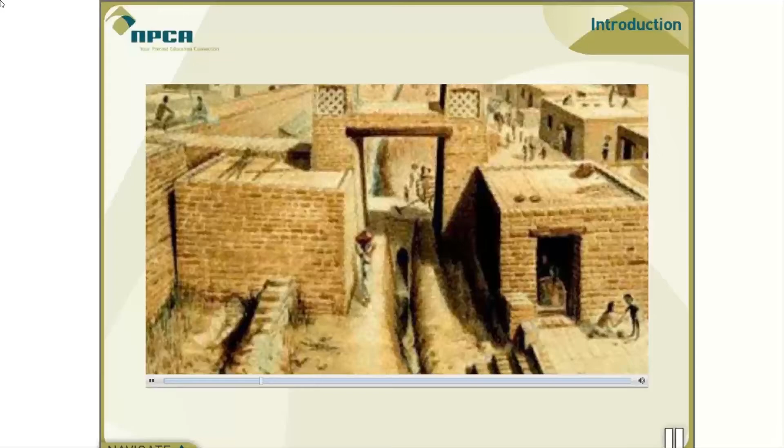Sites excavated in the Indus Valley and in Punjab show that bathrooms and drains were common in Indian cities 4,000 years ago. Streets were drained by covered sewers 2 feet deep and made of molded bricks, cemented with a mortar of mud.

Within the houses, drain pipes were made of pottery embedded in gypsum. Even by 2000 BC, the Greeks and Egyptians had adequate supplies of drinking water for their cities, drained streets, had bathrooms in their houses, and in Crete, water flushing arrangements for toilets.

The Incas also had impressive sewer systems and baths. As sanitary engineers, the Romans set a great example and left their mark in history.

A public water supply was considered a basic essential of civic life. They had well-developed water supply systems and drainage systems, and their standards of engineering sanitation were not matched again in Europe and North America until the 19th century.

Studies show that Rome's water supplies exceeded 40 gallons per head per day and was supplied to public baths, fountains, and other public structures as well as private houses.

At their peak, they were able to provide an estimated 300 gallons per head per day. Their aqueducts and cisterns can be seen all over Europe and were frequently copied in medieval times.

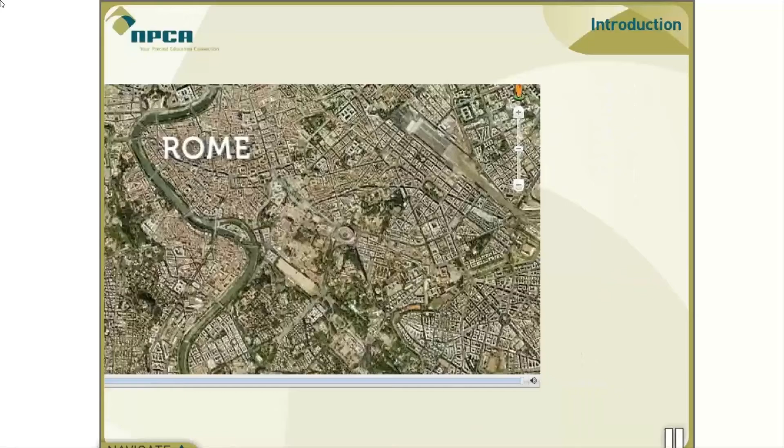The Cloaca Maxima is one of the world's earliest sewage systems. Constructed in ancient Rome in order to drain local marshes and remove the waste of one of the world's most populous cities, it carried effluent to the river Tiber, which ran beside the city.

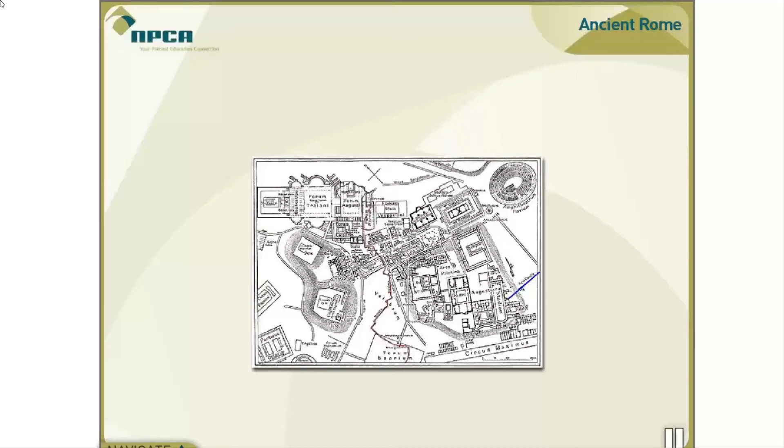The name literally means greatest sewer. According to tradition, it may have been initially constructed around 600 BC under the orders of the King of Rome.

The city's first major engineering achievement was the Cloaca Maxima, an extensive sewer system which still functions today, 2,500 years after it was constructed.

The Cloaca Maxima flushed runoff from Rome's city streets into the Tiber River. Engineers also used the sewer's underground pipeline to drain the marshland between Rome's hilltop villages.

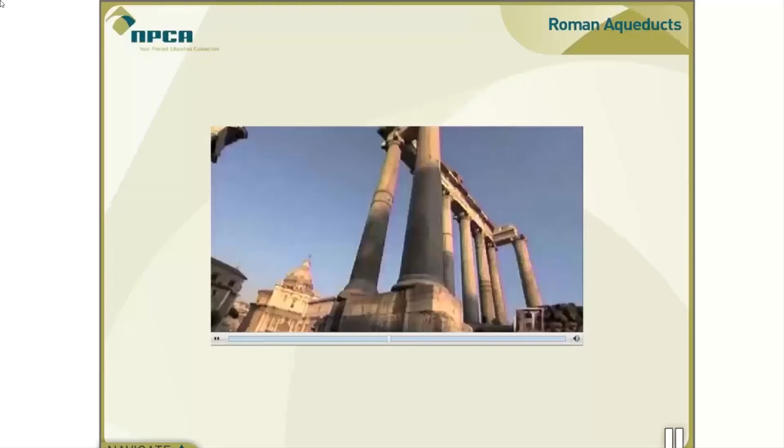There they built the Forum, ancient Rome's downtown district. The construction of the Cloaca Maxima is the key event in transforming Rome from a series of tribes living on disparate hills around a swampy marsh.

into a kind of centralized, unified culture. The new Roman Forum that resulted from the draining by the Cloaca Maxima really allowed that culture to consolidate in one central place.

The Cloaca Maxima was but one example of early civilization's construction of storm sewer systems. Sewer pipe has been found in the ruins of ancient Babylon, which is now in Iraq, estimated to have been built back in 3000 BC.

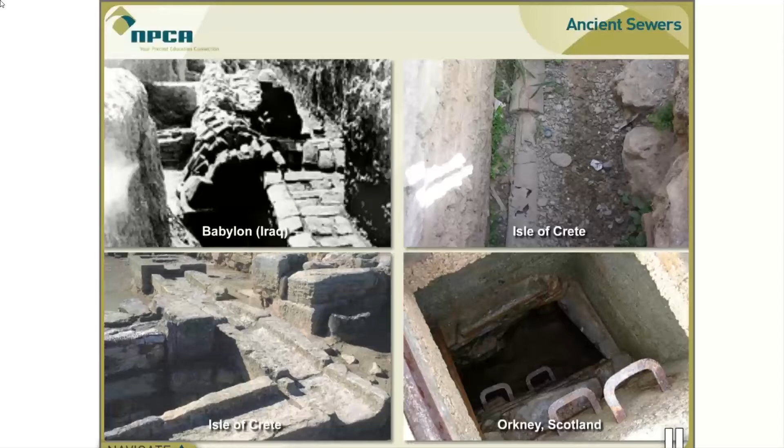Stone drainage channels built in 4000 BC can still be found on the Isle of Crete. Sewer manholes built in 3000 BC have been found in mainland Orkney, Scotland.

As citizens in ancient Rome did back in 600 BC, people today also depend on the functionality and reliability of storm and sanitary sewer systems. There are about 1.2 million miles of sewer pipe in the United States alone.

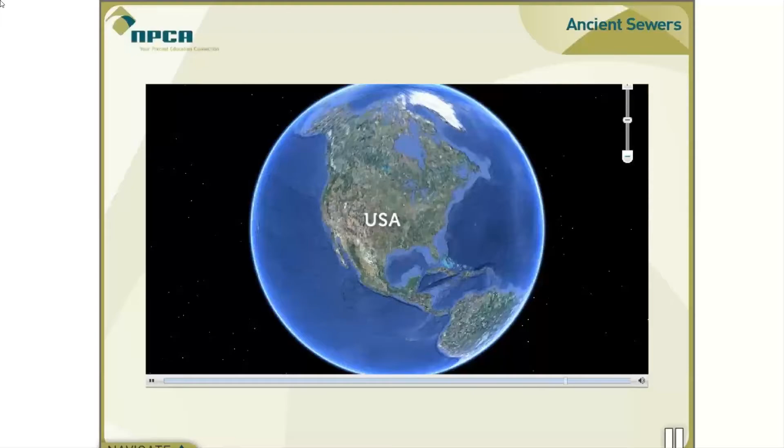Systems in place are sight unseen, and people seldom think about them when they're functioning properly. However, if a system breaks down, it can certainly raise awareness on how important this infrastructure can be to daily life.

Issues can occur when sanitary or storm sewer systems are improperly designed to accommodate the demand. Also, problems may arise when sewer components are poorly manufactured or installed.

Many portions of our sewer infrastructure are failing due to aging. All these factors can eventually contribute to a variety of unfavorable situations, including leakage.

When a sewer system, which is intended to be watertight, starts to leak, there can be serious ramifications to the surrounding environment, public health, and structural stability of the structures.

When a sewer is leaking, sometimes it can undermine the surrounding soil by drawing dirt into the sewer line, creating large voids. Loads above these voids can cause the ground or roadway to cave in.

However, undermining due to leaking at the joint between the pipe and structure can also be the culprit. Here is an example of a slightly more severe cave-in.

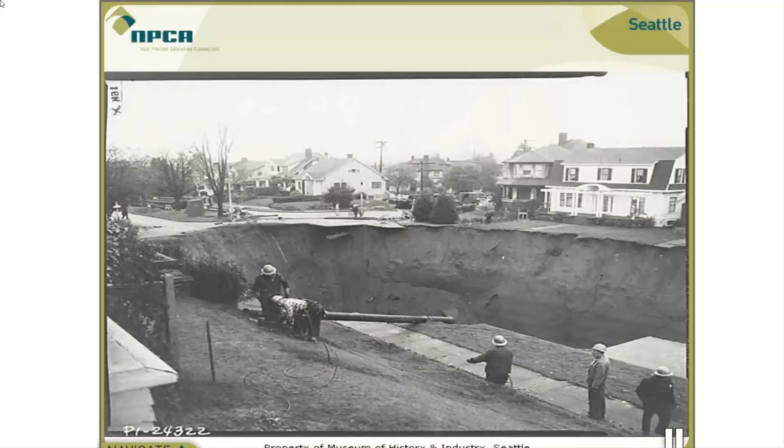We see workmen at the top of the hole caused by a sewer break in Seattle, Washington on November 11th, 1957. The Ravenna trunk sewer line had been built in 1909. The original contractor on the project gave up because of the quicksand prevalent in the area, and it was this quicksand that contributed to the underground cave-in.

A 330-foot deep sinkhole formed in February 2007 in Guatemala City and swallowed about a dozen homes, forcing the evacuation of nearly 1,000 people in a crowded neighborhood. Officials blame the sinkhole on recent rains and an underground sewage flow from a ruptured main. A spokesman for the Municipal Water Authority said the sewage main ruptured after becoming clogged. He said the city was aware of the blockage, and the Army had been considering a controlled explosion to clear the pipe.

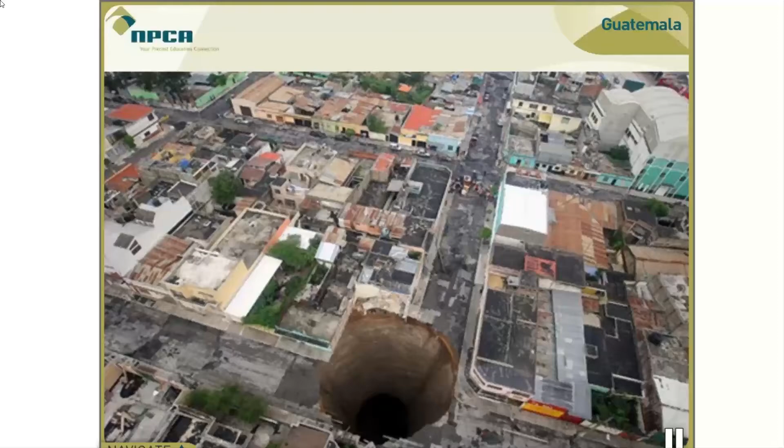The sewer ruptured, and massive undermining took place. When systems are overwhelmed by increased volumes that surpass their capacity, large pressures build up, which can lead to serious damages. Water will always find a way out. In some cases, the pressure causes the water to surge through the manhole casting.

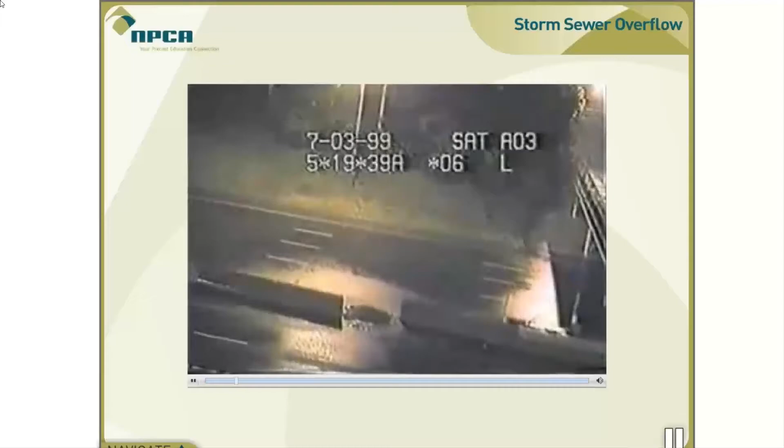Here we see an extreme example of this phenomenon. This is highway camera footage of a portion of I-35 in Minnesota back in July 1999. The stormwater system was severely overwhelmed by the storm event. The point is, to avoid having everything from dips in the road to Old Faithful in the middle of the highway, stormwater and sanitary collection and conveyance systems must be designed, manufactured, installed, and maintained properly.

Now, let's look at sewer system components.

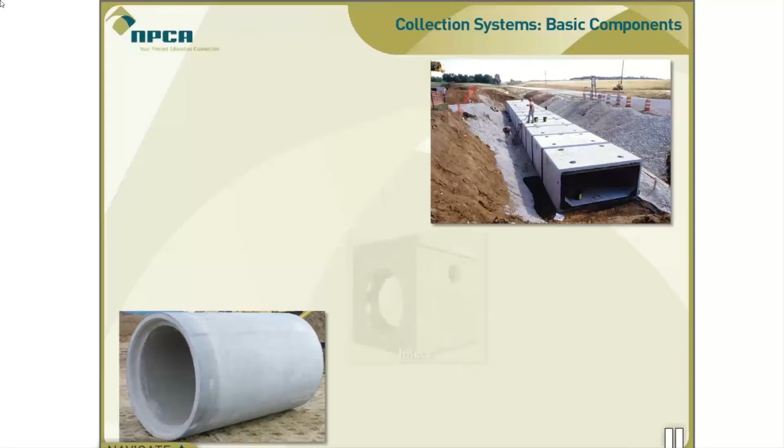The basic components of a sewer system can be divided into pipes and structures. The pipe can be round, elliptical, arch, or rectangular box culvert. Structures can include inlets, catch basins, and manholes.

These basic components are assembled to form a system that collects stormwater and wastewater from homes, commercial properties and surrounding streets, parking lots and landscape out to the main sewer line, and conveys it from point A to point B by gravity or pumps for treatment and disposal.

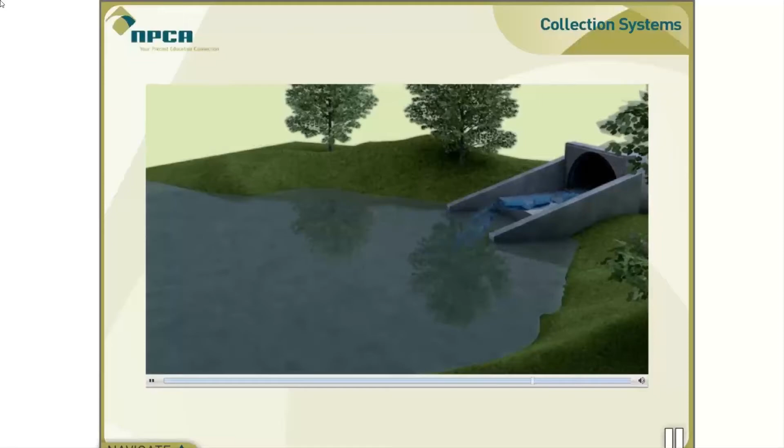At times, conditions may require advanced stormwater systems. Large paved areas such as store parking lots can generate so much surface runoff that systems must be installed that can not only provide treatment, but also temporary storage to avoid overwhelming the main sewer lines.

Structures that can provide a level of treatment can range from basic to complex. Drain inserts are manufactured filtration products placed in a drop inlet or a catch basin inlet to remove sediment and debris. A multitude of inserts exist in various shapes and configurations. Typically, the insert consists of a frame that acts as the support structure for the filtering media and sediment debris collection device. This frame generally rests beneath the grate of a drop inlet or is attached to the wall of a curb opening style catch basin.

Typically, a collection device made of polypropylene, filter fabric, or stainless steel will be attached to the frame, fitting entirely within the dimensions of the inlet structure without blocking the outlet piping. Filtration media will be secured within the collection device and will vary by manufacturer. Media types include polypropylene, porous polymer, treated cellulose, and activated carbon, depending upon the targeted pollutants.

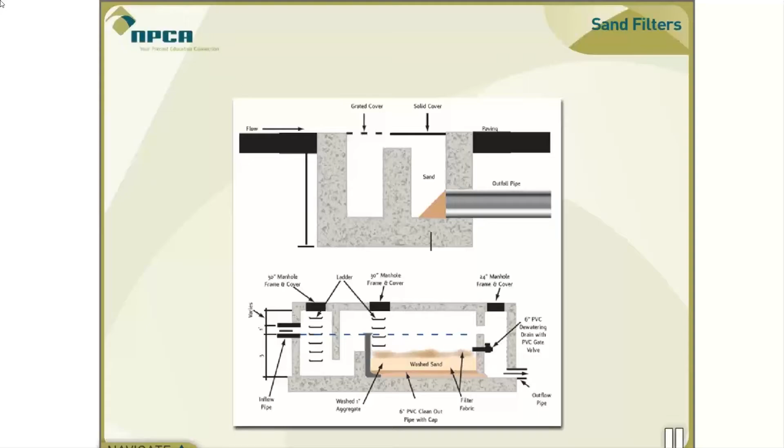Water quality units, also commonly called trapping catch basins, oil grit separators, or oil water separators, consist of one or more chambers that promote sedimentation of coarse materials and separation of free oil, as opposed to emulsified or dissolved oil, from stormwater. Some WQUs also contain screens to help retain larger or floating debris. And many of the newer designs also include a coalescing unit that helps promote oil-water separation.

WQUs typically capture only the first portion of runoff for treatment and are generally used for pre-treatment before discharging to other best management practices.

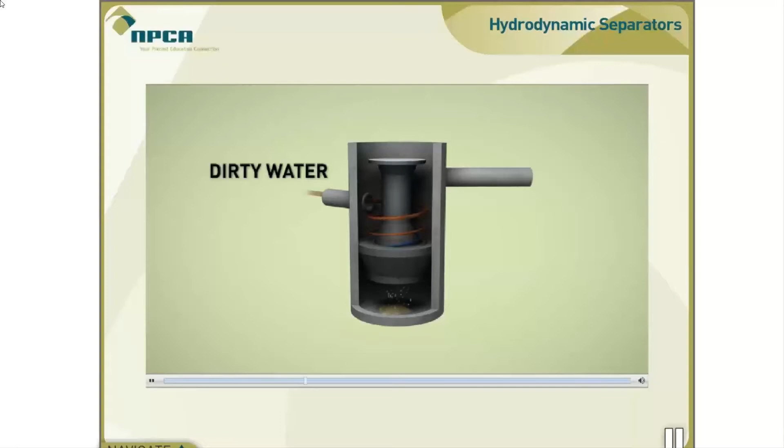Hydrodynamic separators are flow-through structures with a settling or separation unit to remove sediments and other pollutants, widely used in stormwater treatment. No outside power source is required because the energy of the flowing water allows the sediments to efficiently separate. Depending on the type of unit, this separation may be by means of swirl action or indirect filtration.

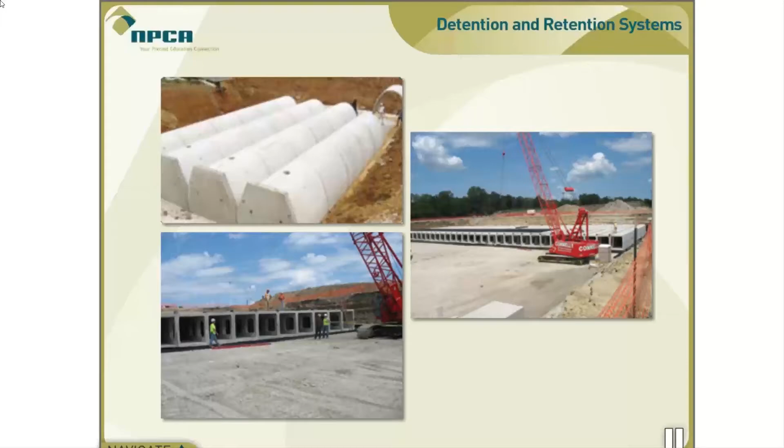Underground stormwater retention-detention systems capture and store runoff in large pipes or subsurface structures. Stormwater may enter the system through a riser pipe connected to a catch basin or other stormwater collection structure, and then it flows into a series of underground chambers or compartments for storage.

This captured runoff typically is retained throughout the storm event and then released directly into the surface waters through an outlet pipe. This outlet is sized to release the stored runoff at predetermined flow rates that serve to reduce the effects of pollutants leaving a site during peak flows.

These systems typically are constructed in highly developed areas where land cost and availability are major concerns. They will generally be located under parking lots or other paved surfaces in commercial, industrial, or residential areas.

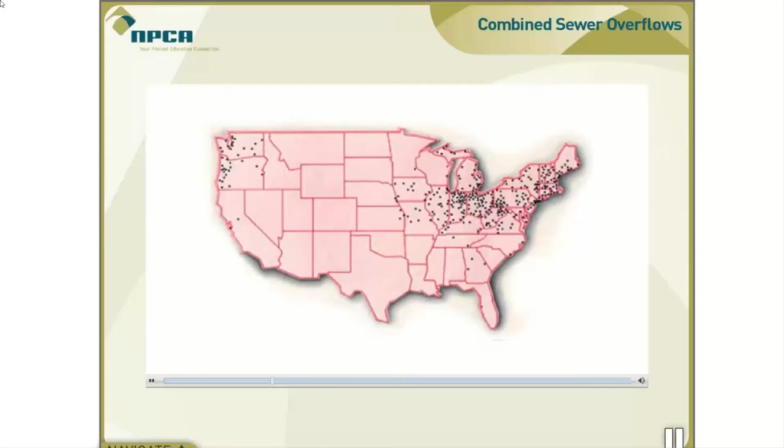Combined sewer overflows, otherwise known as CSOs, and sanitary sewer overflows affect the quality of water resources in many parts of the United States. Over 800 communities have combined sewer systems, serving about 40 million people, mostly in the Northeast, the Great Lakes region, and the Pacific Northwest.

CSO discharges during heavy storms can cause serious water pollution. A 2004 EPA report to Congress estimated that there are 9,348 CSO outfalls in the U.S., discharging about 850 billion gallons of untreated wastewater and stormwater to the environment.

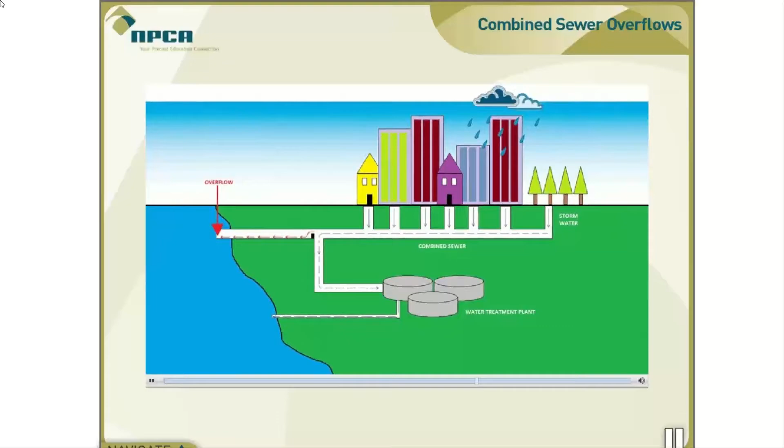EPA estimates that between 23,000 and 75,000 sanitary sewer overflows occur each year, resulting in releases of between 3 and 10 billion gallons of untreated wastewater.

Portland is a city located in the northwestern United States, near the confluence of the Willamette and Columbia Rivers in the state of Oregon. Portland is Oregon's most populous city and the third most populous city in the Pacific Northwest. Approximately 2.2 million people live in the Portland metropolitan area.

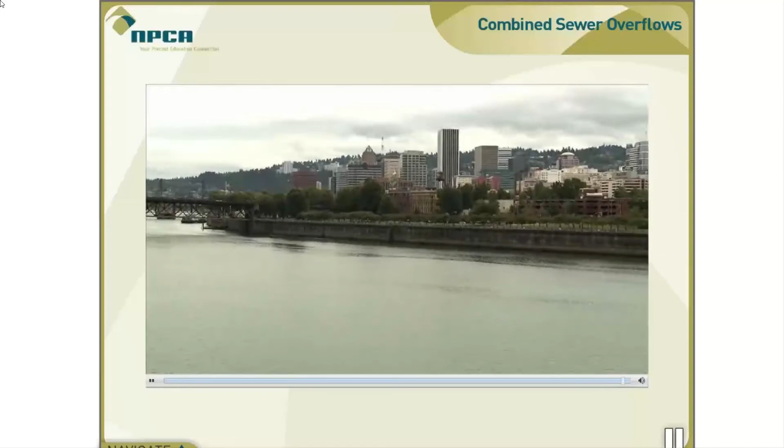River health is a prime concern to our citizens, but also the beauty of the river, the ecosystems, and community health, which is tied to river health.

Ideas were brought forward to update the sewer system to greatly reduce or eliminate combined sewer overflow into the Willamette River. But if you went back 20 years, the idea of swimming in the Willamette River would have been of concern. But you see more boating, canoeing, kayaking, fishing, which I think is evidence of cleanup efforts that the city has undertaken, creating a healthier riverway.

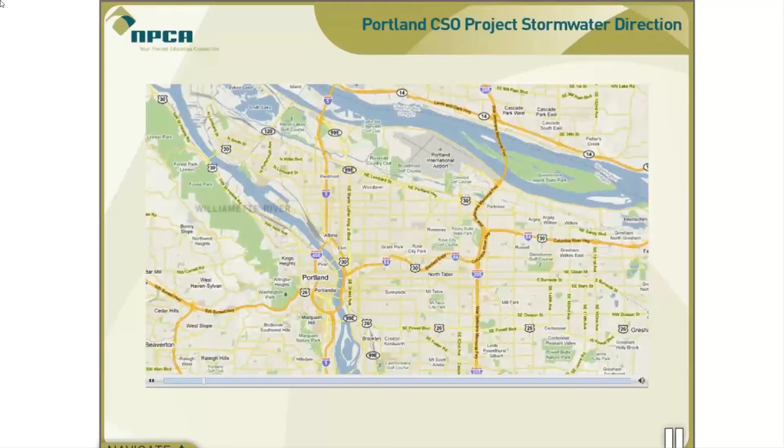During heavy rains, a large portion of the runoff goes to the Willamette River. A portion of the runoff flows into the Columbia Slough.

In the past, during rain events, combined sewers were overwhelmed to a point where the excess wastewater would be discharged into the Willamette River. The wastewater carried raw sewage that polluted this major waterway and negatively impacted the quality of life for Portland residents.

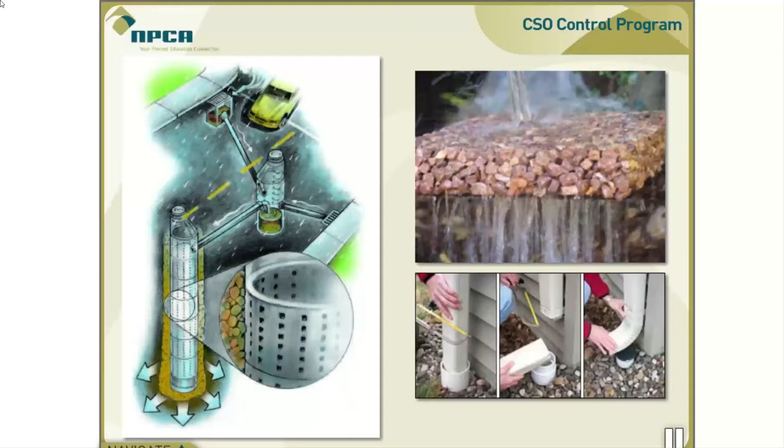Portland started the CSO control program in 1991 with a set of cornerstone projects that removed stormwater from combined sewers. Projects included disconnecting downspouts from sewer systems, using pervious pavers, installing street sumps and sedimentation manholes. Controlling the CSOs was key to improving Willamette River water quality.

In 1991, the state of Oregon gave the Portland Bureau of Environmental Services a final order to clean up the Willamette River and the Columbia Slough by December 1st, 2011. After nearly 20 years, the program is complete and added up to approximately $1.4 billion in costs.

CSO solutions include projects to remove stormwater runoff from sewers and building new facilities to carry sewage and stormwater to the Columbia Boulevard wastewater treatment plant.

With the installation of large pipe along the riverbank, a diversion is created for the overflow. The purpose of this diversion is to transport the combined sewer overflows that would normally flow into the river to a pump station and then eventually a treatment facility.

The CSO program started around 15 to 20 years ago, and its purpose was to separate the combined sewer overflow system that was currently in place. There were two massive tunnels built under the Willamette River to contain the overrun during a storm event and hold it there until the treatment facility could handle treating it. So it sits under the river and then eventually is pumped into the treatment facility and treated.

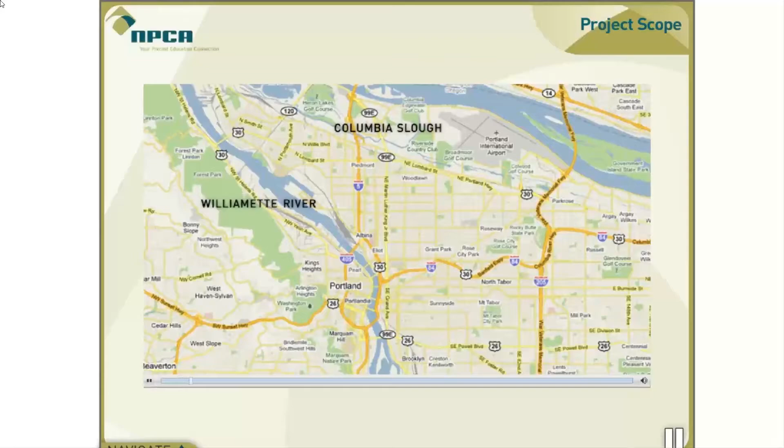Looking at the map of Portland, we see the east and west side big pipe on either side of the Willamette River. The pipes enter into the Swan Island pump station on the east side of the Willamette, which then directs the water through the Portsmouth force main north to the Columbia Boulevard wastewater treatment plant. The Columbia Slough consolidation conduit also flows directly into this treatment plant.

Construction of the Swan Island pump station and the west side big pipe was completed in 2006. The west side big pipe measures 14 foot in diameter and is 3.5 miles long. The east side big pipe measures 22 foot in diameter and is 6 miles long. As a result of this project, CSOs to the Willamette River have been reduced by 94%.

Some of the pipe was installed using a micro-tunneling process. That method is similar to ones used for massive underground projects, such as the Big Dig in Boston and the Channel Tunnel underneath the English Channel. This process allows the pipe to be installed without interrupting commerce or disturbing utility services buried under the surface of streets and roadways.

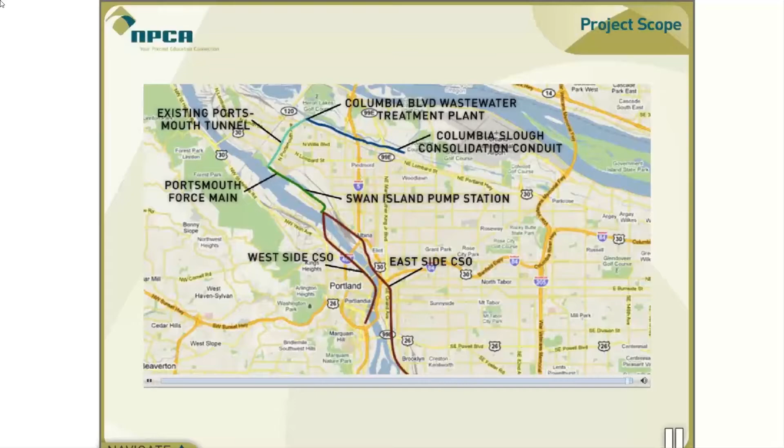Well, the micro tunnel process is you've got your tunnel boring machine, which is the first thing they launch into the hole. The tunnel boring machine has a cutting head. It's 50 feet long overall, 10 foot long segments. It's quite a machine, but it has no method of self-propulsion. So the only way to get the machine to move forward is to put a piece of pipe behind it and then push it with a couple hydraulic rams.

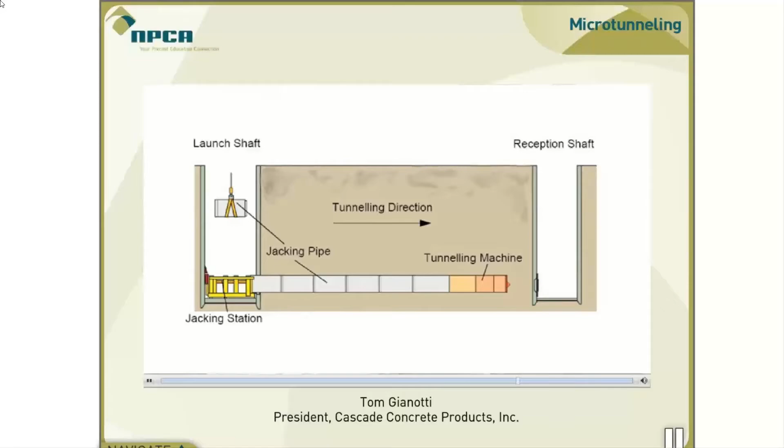So what they do is they push the machine into the hole first, then they'll load in their first pipe. They will push the pipe with the rams, retract the rams, load in another pipe, push, and so on. Now, every time they put in a new piece of pipe, there's conduits, there's plumbing, there's air ducts, all sorts of things need to be connected and plumbed inside that pipe before they can start pushing.

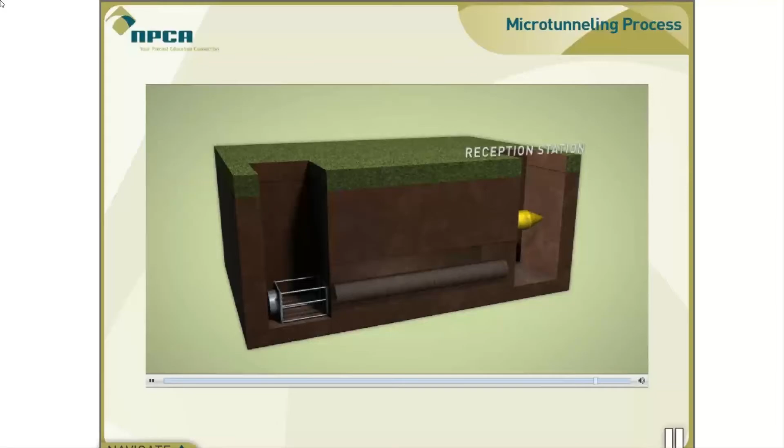At the launching station, a section of pipe is lowered into position. Hydraulic jacks then push the pipe forward, which propels the drill head through the earth until it emerges at the reception station. The drill head is not self-propelled. It moves forward due to the pressure exerted via the hydraulic jacks in the launch tunnel. The hydraulic jacks produce a substantial axial load on the pipes, which serve as a conduit for the jacking forces to propel the drill head.

So it's very critical that each pipe in the string performs. Because if one were to fail, if one link in the chain fails, the machine is stuck. And that could be a real problem.

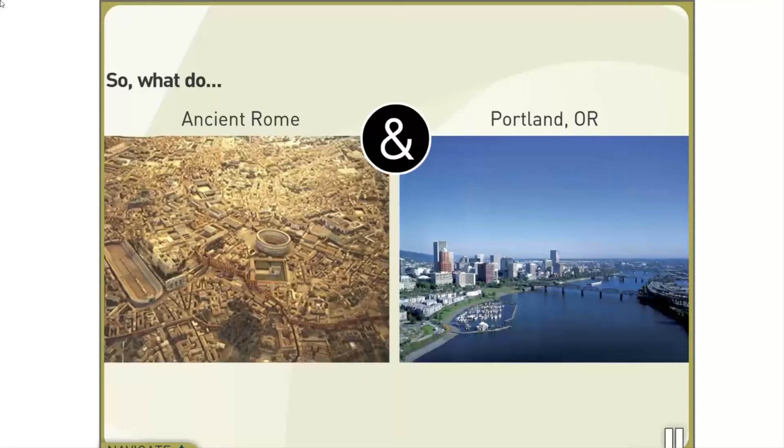So, what do ancient Rome and present-day Portland have in common? Concrete. Just as we do today, ancient civilizations chose concrete as their material of choice. Many of the pipe and structures unearthed recently by archaeologists were made of concrete. Modern technology enables us to move the manufacturing of concrete from the variable conditions in the field to a plant environment which greatly enhances quality control.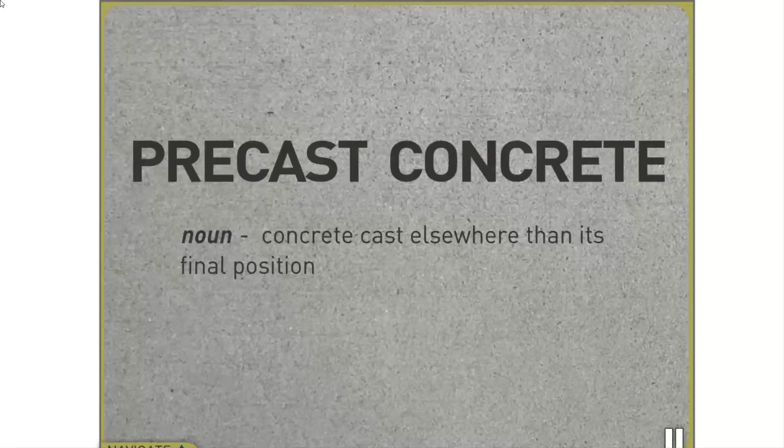Concrete that is cast elsewhere than its final position is known as precast concrete. Precast concrete structures are manufactured in a controlled environment that enables careful monitoring and management of quality control procedures. Let's go through the typical manufacturing process. The production cycle begins with setting of the forms. The core for this section of large diameter precast pipe is set in place.

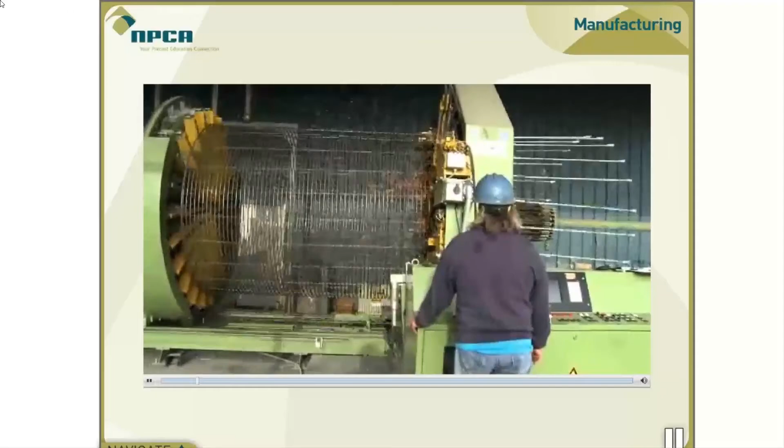Reinforcement for this section of pipe is assembled in another area. This cage machine precisely measures, cuts, and welds lengths of plain and deformed wire to form the reinforcement cage. Additional deformed rebar is placed and tied onto the cage according to design drawings. This will further enhance the pipe's ability to withstand stresses in the field. Manhole cages are built in a similar fashion, while inlet and box culvert cages are assembled by hand.

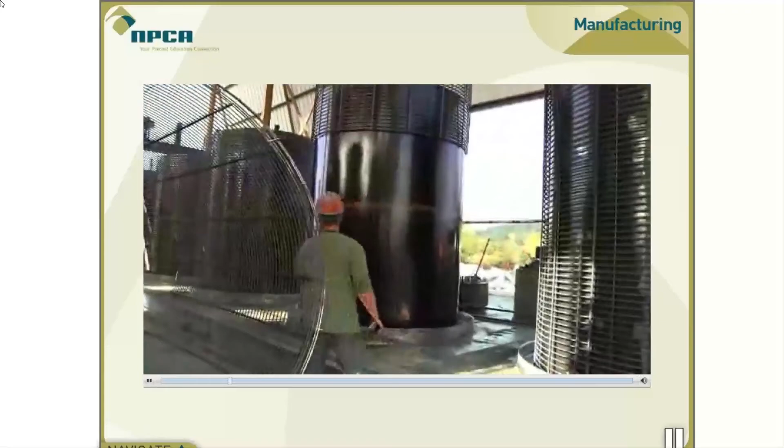After form release has been applied to the core, the steel reinforcing cage is put in place. The diameter of this cage is manufactured to exacting dimensions and has to be carefully placed to maximize its efficiency while providing enough concrete cover to protect it from the elements. In this case, design calls for an additional slightly larger diameter cage to be placed in the form as well.

Engineers consider all loading conditions, including handling, shipping, installation, and service loads when performing these designs. Standoffs are placed to keep the cage in the right position so they don't shift when the concrete is poured.

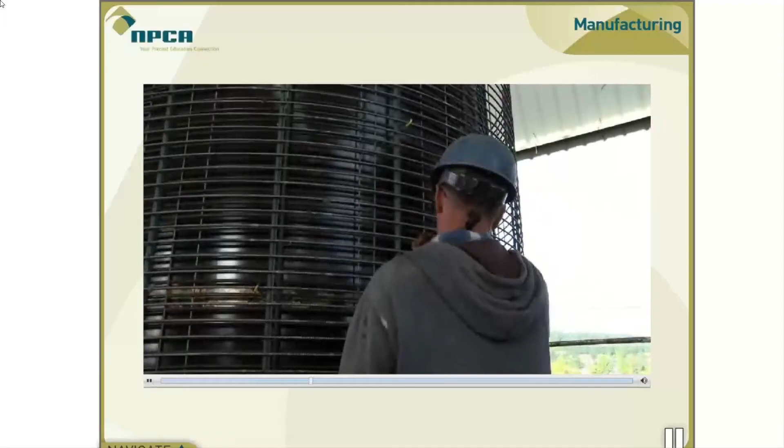A quality control technician carefully looks at the cage prior to closing the form to ensure that proper clearances are in place. This is referred to as the pre-pour inspection and is one of many quality inspections performed throughout the manufacturing process. The form's outer jackets are coated with form release and then assembled.

Other drainage structures such as manholes, inlets, and box culverts go through a similar pre-pour process. If a manhole or inlet is designed for pipe entrances, the QC technician will verify the positions of blockouts prior to closing the form. The batch plant operator then fires up the mixer.

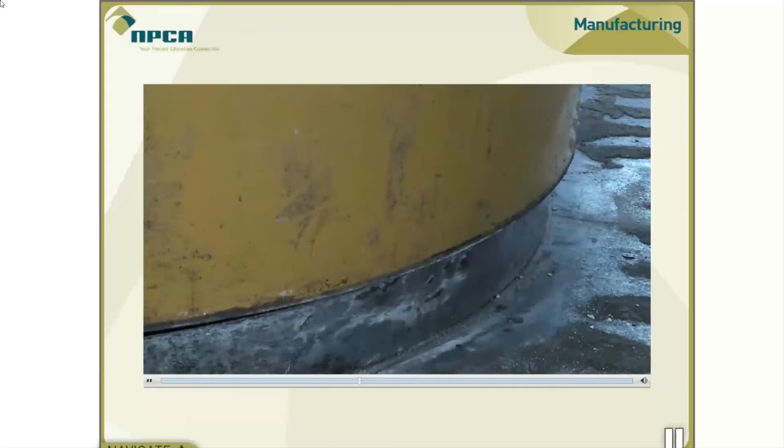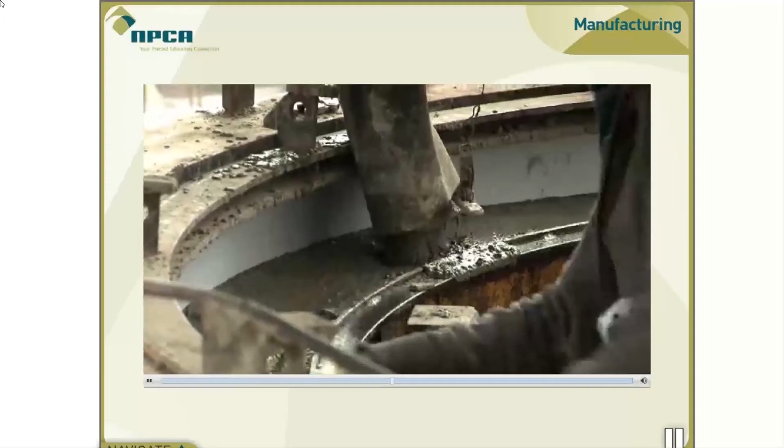Most batch plants are automated and measure and dispense specific amounts of raw materials according to the designated mix design. Once the batch is mixed, it is dumped into a bucket, which transports the fresh concrete to the form. The concrete is carefully deposited to avoid segregation and is consolidated into place with the use of vibratory equipment.

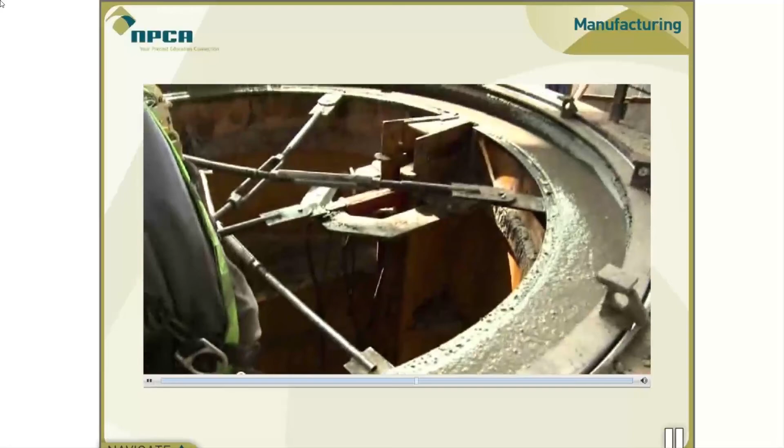Consolidation is a critical step in the process as it is used to drive out entrapped air, which, if not removed, may increase porosity and therefore lower the strength of the concrete. During this time, testing of the fresh concrete is performed. Here we see a spread test.

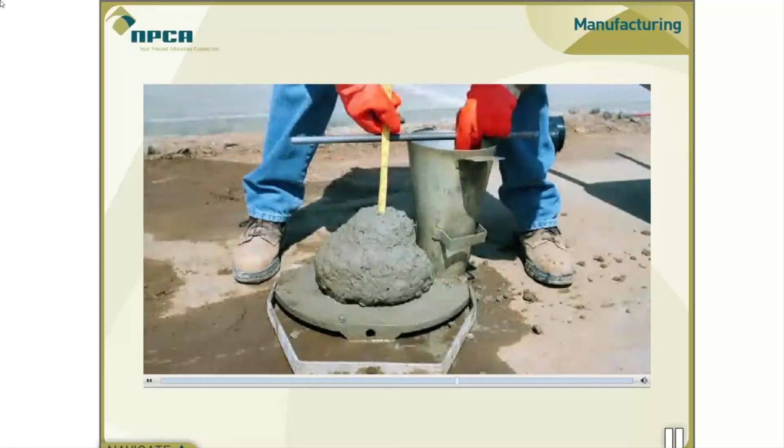Spread tests are done when using self-consolidating concrete, also known as SCC. Once the cone is lifted, the technician measures the spread, which is an indication of proper water-cementitious ratio. Conventional concrete has a similar test, called a slump test. Other tests include temperature, unit weight, and air content.

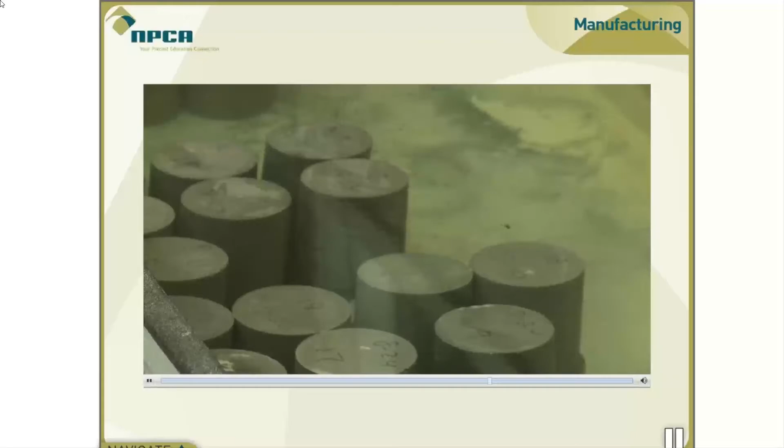Cylinders of fresh concrete are placed in curing conditions similar to that of the product, so accurate measurements of the 3, 7, and 28-day strengths of the concrete can be taken. Some cylinders are placed in a water bath to provide 100% moisture for quality control laboratory testing. All of these cylinders will later be used to measure the compressive strength of the concrete.

Once concrete products are poured, they are left in the forms to cure until they reach the required stripping strength. Different methods of curing are used depending on conditions and product type. Curing enclosures are sometimes used to help provide adequate moisture and temperature. Proper curing is essential in ensuring the cement fully hydrates, maximizing hardened concrete's characteristics.

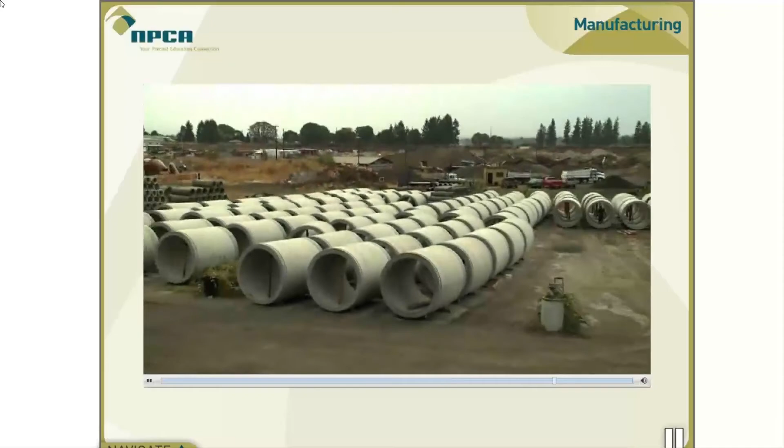Once minimum stripping strength is achieved, the products are stripped from the forms. They are inspected by the quality control technician to ensure they meet specifications and design drawings. After the QC technician approves the product, it is marked and moved to the storage area. This post-pour inspection is a critical element of any precast plant's quality control program. Any product out of tolerance is marked accordingly and stored in a separate area or crushed and recycled.

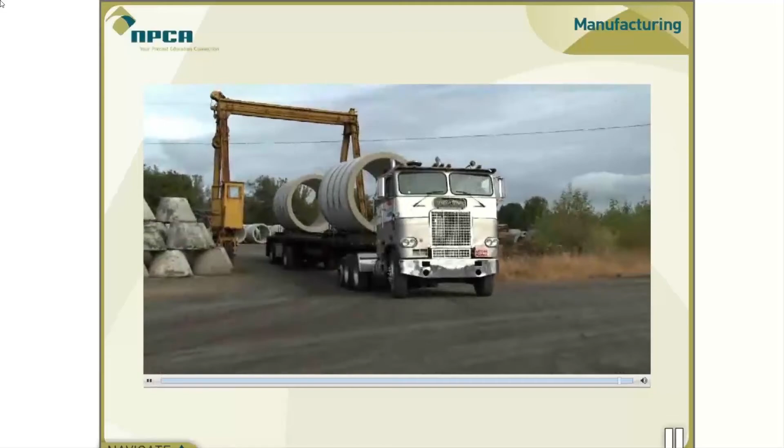When it's time for delivery, products are loaded onto trucks and securely fastened to the bed. A QC technician will then perform a final inspection to ensure the proper products are being shipped and that no damage has occurred during handling. The precast concrete products are then delivered to the job site for quick and easy installation.

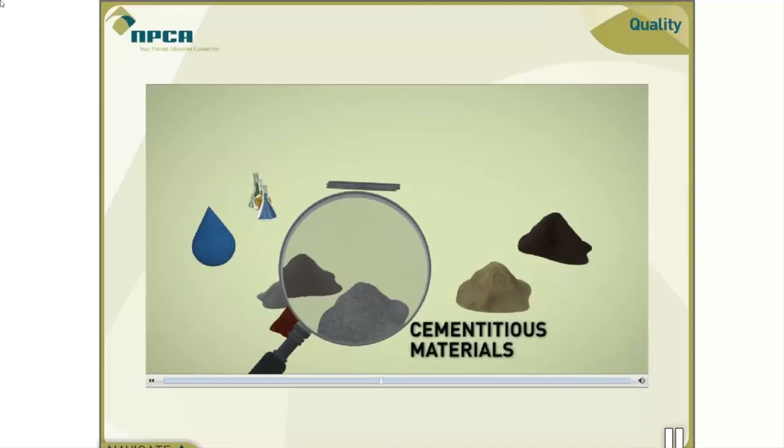When choosing a material for sewer structures, several factors should be considered: quality, strength, water tightness, durability, buoyancy resistance, ease of installation, and sustainability. Let's start with quality. The quality of precast concrete products depends on the quality of the raw materials, including aggregates, cementitious materials, water, admixtures, and reinforcement.

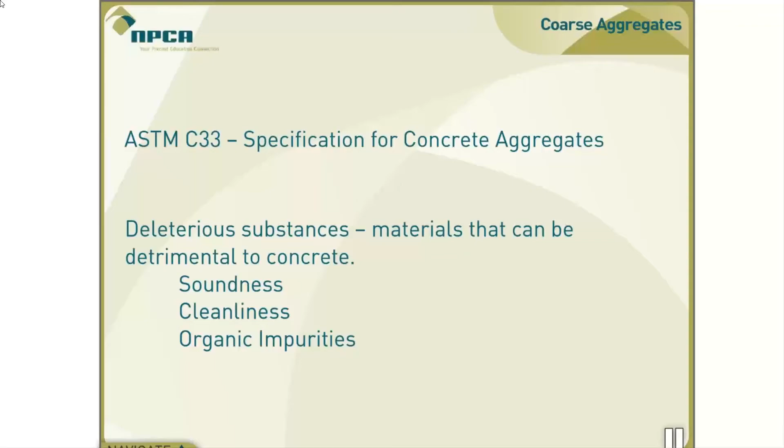Aggregates are an essential ingredient in concrete. They can consist of 60 to 75% of the total volume of concrete. For a quality concrete mix, aggregates need to be clean, hard, strong particles, free of absorbed chemicals or coatings of clay and other fine materials that could cause the deterioration of concrete.

The correct gradation of aggregates is also crucial. Aggregates are divided into two distinct categories: fine and coarse. Quality and grading are controlled by very strict requirements, including those of ASTM C33, standard specification for concrete aggregates.

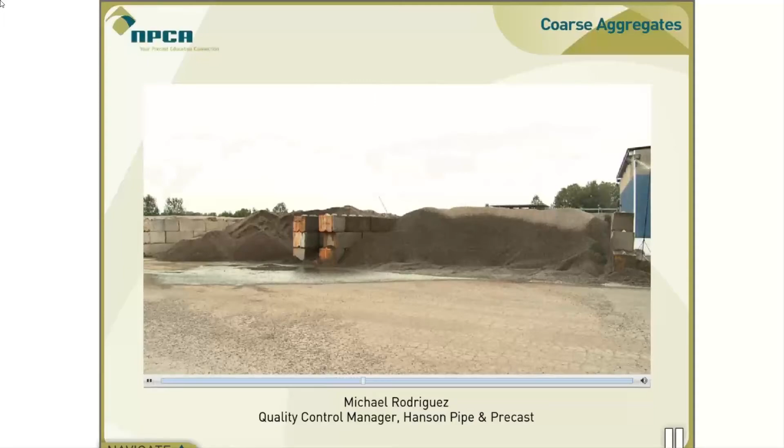The aggregates that we get go through a process control. So our suppliers are providing us with process control that is state compliant. So there's a lot of testing that goes into it. Some of this will include ASR testing to see if that's applicable, if we've got something that's expansive, to sodium sulfate soundness testing. So our aggregate right from the get-go is being tested.

It gives us a certain level of quality right from the beginning. So we know we've got a product that's had to pass quality tests and that is being tested on a consistent basis that meets the DOT standards. Cement used in the manufacturing of precast concrete is known as Portland cement and is considered a hydraulic cement. This means it reacts with water, a process called hydration, to harden it as it cures.

Portland cement used in precast concrete must also adhere to strict requirements, including those of ASTM C150, Standard Specification for Portland Cement. Supplementary cementitious materials, or SCMs, play a key role in enhancing the quality of precast concrete. They contribute to the properties of hardened concrete through hydraulic or pozzolanic activity. These materials react chemically with calcium hydroxide released from the hydration of Portland cement to form cement compounds.

These materials are often added to concrete to make concrete mixtures more economical, reduce permeability, increase strength, or influence other concrete properties. Typical examples of SCMs are natural pozzolans, such as fly ash, ground granulated blast furnace slag, and silica fume.

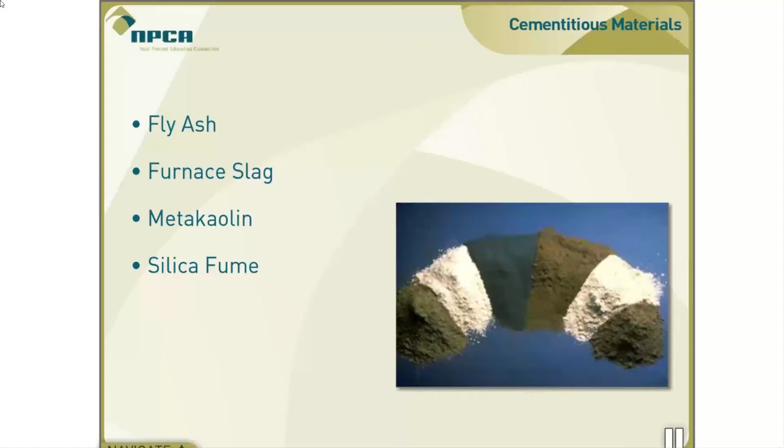Almost any natural water that is drinkable and has no pronounced taste or odor may be used as mixing water for precast concrete. However, some waters that are not fit for drinking may be suitable for concrete as long as it meets the requirements of ASTM C1602, Standard Specification for Mixing Water Used in the Production of Hydraulic Cement Concrete.

Chemical admixtures are the ingredients in concrete other than Portland cement, water, and aggregate that are added to the mix immediately before or during mixing. Producers use admixtures primarily to modify the properties of hardened concrete and to ensure the quality of concrete during mixing, transporting, placing, and curing.

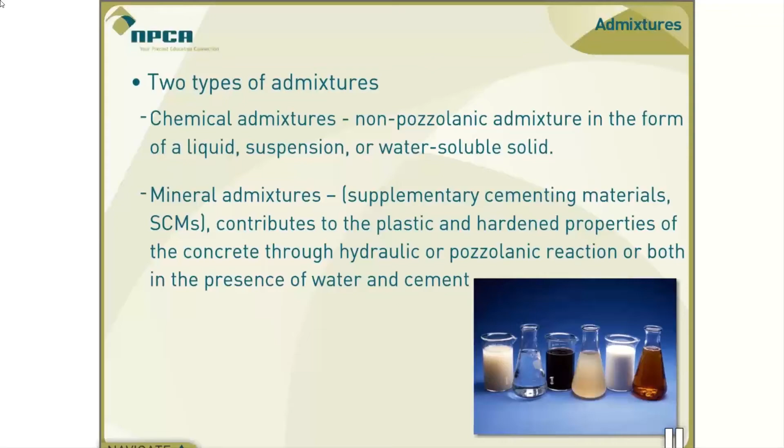Examples of concrete chemical admixtures are air entraining, which is recommended to improve precast concrete's resistance to freezing when exposed to water and de-icing chemicals. Water-reducing admixtures, which will reduce the required water content for a concrete mixture and increase its strength. And accelerating admixtures, which will increase the rate of early strength development, reduce the time required for proper curing and protection, and speed up the start of finishing operations.

Reinforcing steel is used in precast concrete to enhance its ability to counter forces in manufacturing, handling, and in service. Precast concrete is weak in tension compared to its compressive strength. Steel reinforcing is very strong in tension and will absorb tensile forces in the concrete to prevent failure. Selection and placement of reinforcement is crucial to enable it to do its job. Quality is governed by many requirements and specifications, including ASTM's A615 and A706.

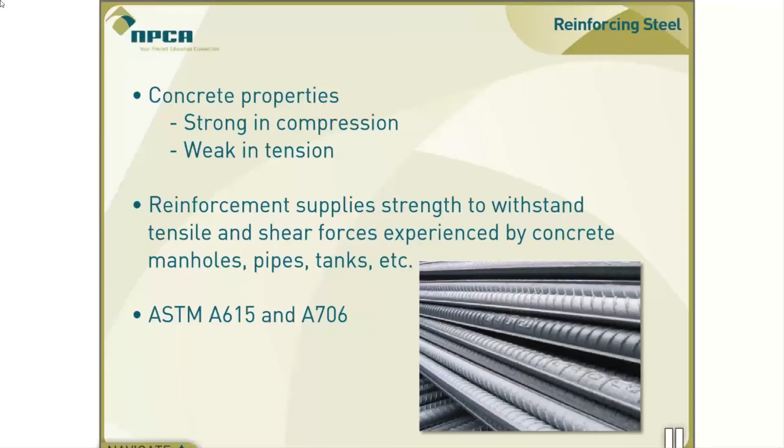These raw materials are inspected and controlled by QC personnel. However, this is but one of many factors involved in a thorough quality control program. It's pretty extensive. If you do it right, you have to, all the way down to the certification of the steel. You have to check the weights of the steel. There's testing to make sure that the aggregate is correct, sieve tests and water tests.

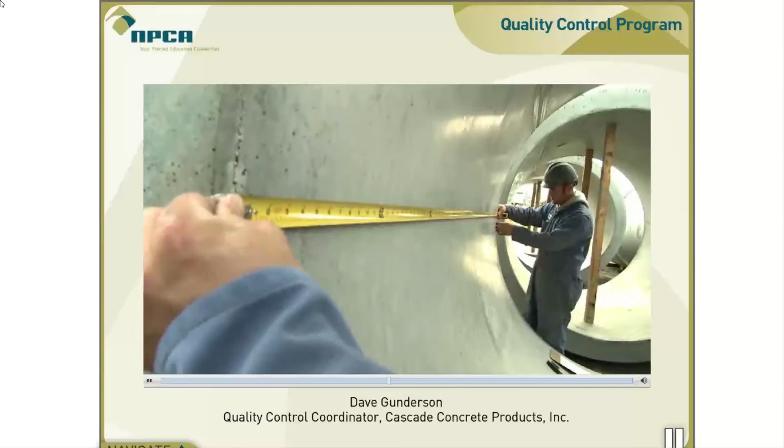And then we test the probes in the mixer to make sure they're calibrated correctly and that the right water cement ratio is going into the pipe. And then we check the steel clearances on everything before we pour the concrete, the clearances between the form and the steel, to make sure if you get any corrosion or water infiltration, it's not going to reach the steel. And then after the finished product is out, we check it again to make sure it's right.

And then before we ship it, we check it for squareness. Like if it's a lay down pipe, such as these, we have to make sure that it's square. And these are being pushed through the ground. So we measure it 19 different ways to make sure it's square. We check all the wall thicknesses to make sure they're within spec. We check it to make sure there's no exposed steel. We make sure that the bell is correct, the protrusion is correct to support the rubber gasket going in.

It's my name on that product. I'm the final person that looks at it. And that means a lot to me. And I'm not going to let something slide through that isn't right.

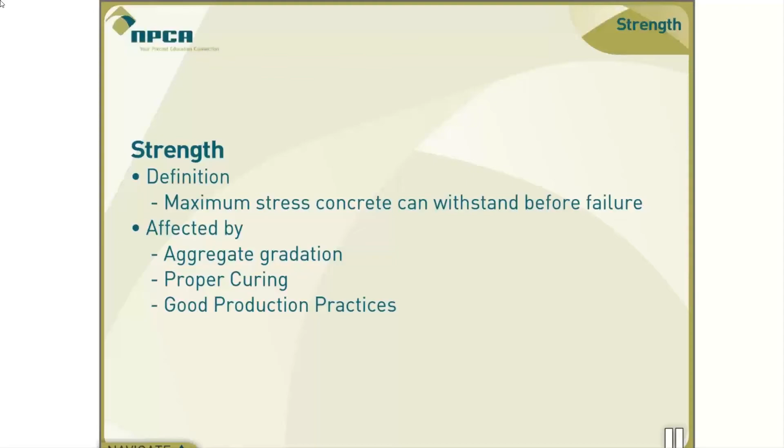Precast concrete strength is defined by its ability to withstand stresses. It relies mostly on the quality of the aggregates and proper production and curing practices. Precast concrete strength is usually expressed in pounds force per square inch of resistance to compressive loading.

The compressive strength of precast concrete is measured by breaking cylindrical concrete specimens in a compression testing machine as per the requirements of ASTM C39. The load is increased until failure, and that load is divided by the cross-sectional area of the specimen, resulting in the compressive strength of the concrete.

Precast concrete pipe has to meet several acceptance requirements as per ASTM C76, standard specification for reinforced concrete culvert, storm drain, and sewer pipe. One of these requirements is the 3-edge bearing test. Expressed in pounds per linear foot per foot of inside diameter, this method tests the pipe under severe loading conditions where there is no bedding and no lateral support under 3-point loads. The standard for this test method is ASTM C497.

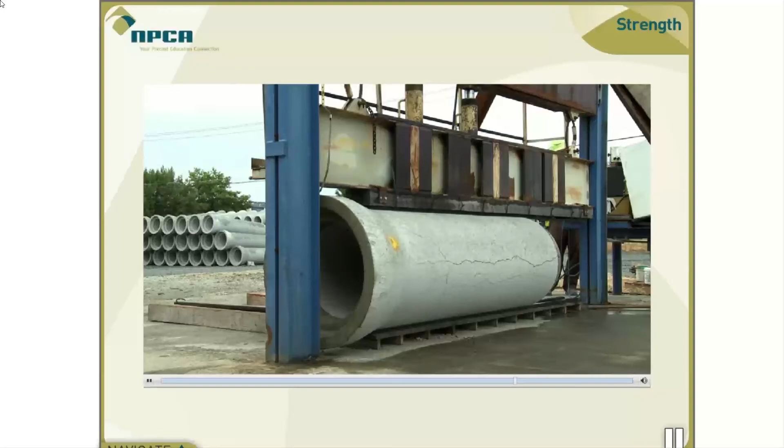A force is gradually applied over the length of the pipe until a crack having a width of 0.01 inches over a length of 1 foot appears. The load is measured and has to meet or exceed the specified load, referred to as D load in ASTM C76 for that class of pipe. The pipe is then crushed to failure, and that load is measured and has to meet or exceed the specified ultimate D load. In the case of the CSO project in Portland, Oregon, strength was a key factor in the selection of precast concrete pipe.

Not only would this pipe be subjected to large stresses in service, but it would also be subjected to tremendous jacking loads during installation.

It's actually a well-designed pipe, and it's designed to take these jacking loads. We've got a jacking system that's capable of producing 900 tons onto that pipe, and it can take more way over that actual jacking load.

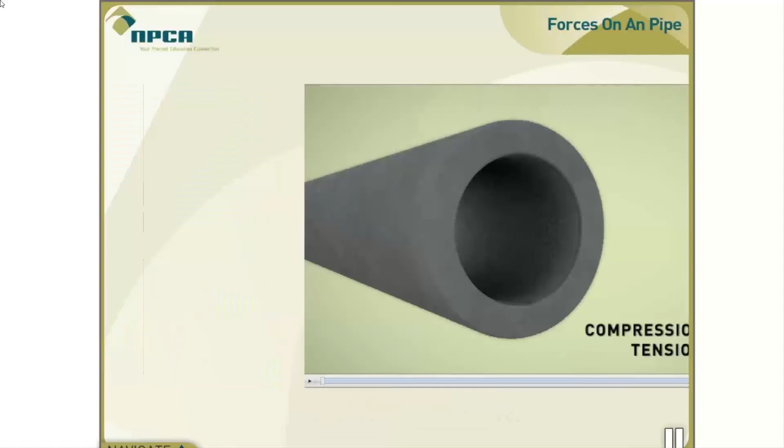Horizontal or axial loads exist primarily during installation. Vertical loads on the pipe include the soil load above the pipe, the weight of the pipe, the weight of fluid within the pipe, and any live load or surcharge loads.

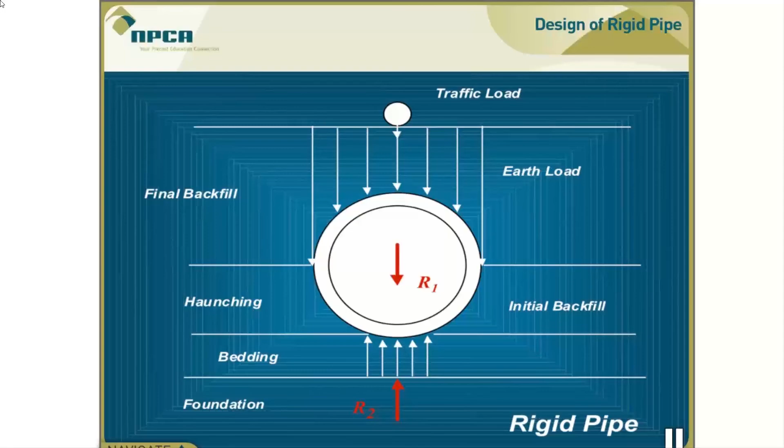Pipes are designed so that when subjected to external forces, reinforcing is placed in key areas to help the concrete withstand tensile forces. Forces on an inlet and pipe system include live loads from traffic, surcharge loads, and soil loads. These loads are all considered when engineers calculate design criteria, such as the size and placement of the reinforcing.

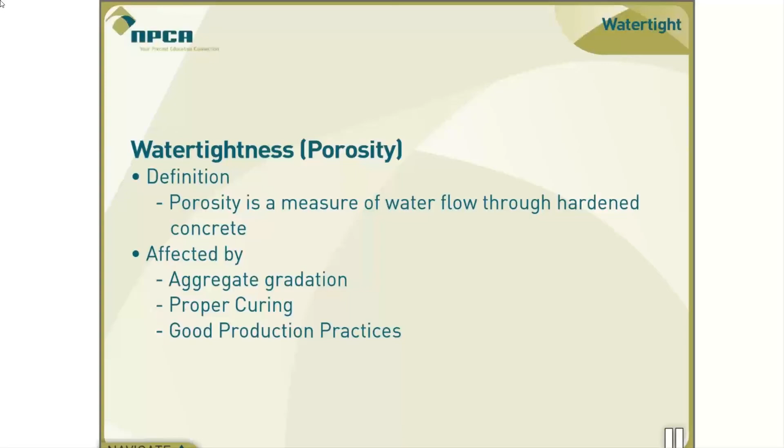Let's look at water tightness. Water tightness is defined as such tight construction or fit as to be impermeable to water, except when under sufficient pressure to produce structural discontinuity. The goal is to minimize porosity and permeability. Porosity is the ratio of the volume of openings to the total volume of material. In other words, porosity represents the storage capacity of the material.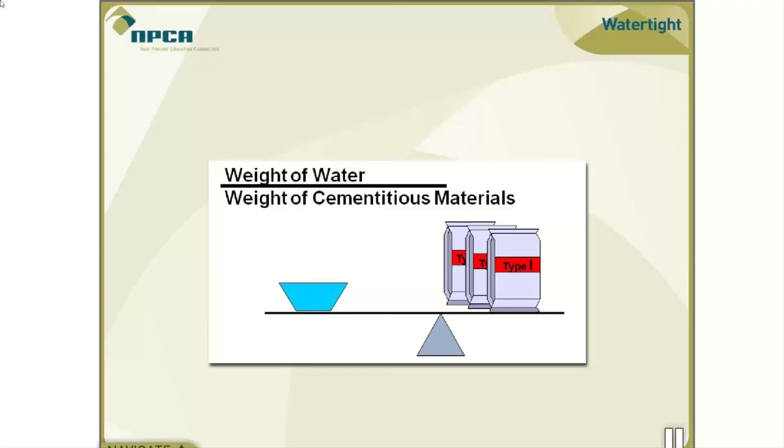This is controlled by carefully monitoring and controlling the water cementitious ratio of the concrete mix. Just enough water is required to properly hydrate the cement. Excess water will evaporate and leave pores in the concrete, therefore increasing porosity. Permeability is a measure of the ease with which fluids will flow through a porous material. So the higher the porosity, the higher the permeability, and the lower the level of water tightness.

Many systems, especially sanitary sewers, are required to be watertight. Precast concrete products manufactured in a quality-controlled environment and used with high-quality sealants and connectors offer a superior solution to water tightness requirements.

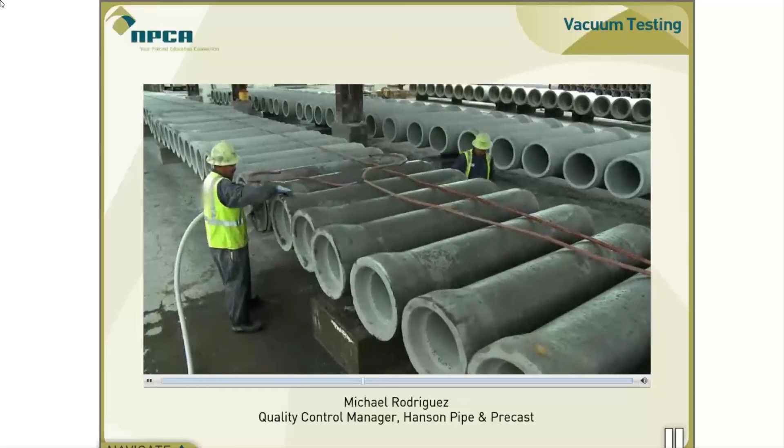Manufacturers of precast concrete pipe test water tightness by performing a vacuum test. With a vacuum test, we're basically plugging either end of the pipe and we're putting it under a certain vacuum and we're seeing how long it takes for us to lose that vacuum. We're basically measuring the same thing. We're seeing if this is a tight product, if this is a product that is not going to leak.

Vacuum testing is a quick, safe, and practical way to validate manhole system integrity. Manhole sections can be tested at the precast concrete plant prior to delivery or on site prior to backfilling. Vacuum is defined as an absence of matter in a defined volume of space.

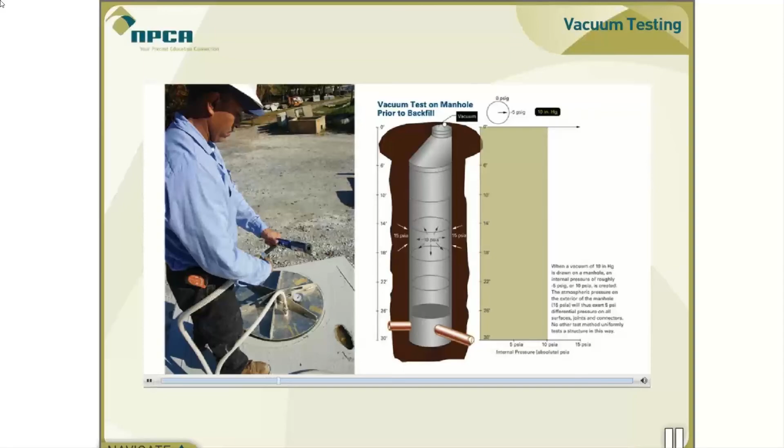To produce a vacuum in the field, we need to remove air from within the manhole structure. Initially, a manhole, which has not been backfilled, is uniformly loaded by atmospheric pressure of 15 pounds per square inch absolute on its interior and exterior, creating an equilibrium state.

To create a vacuum, we use a pump, or Venturi nozzle, attached to the manhole and attempt to suck out the air to create a pressure differential between the partial vacuum inside the manhole and the atmospheric pressure pressing against the exterior of the manhole. When a vacuum of 10 inches of mercury is drawn on a manhole, an internal pressure of roughly 10 pounds per square inch absolute is created. The atmospheric pressure on the exterior of the manhole, 15 psia, will thus exert 5 psi differential pressure on all surfaces, joints, and connectors. No other test method uniformly tests a structure in this way.

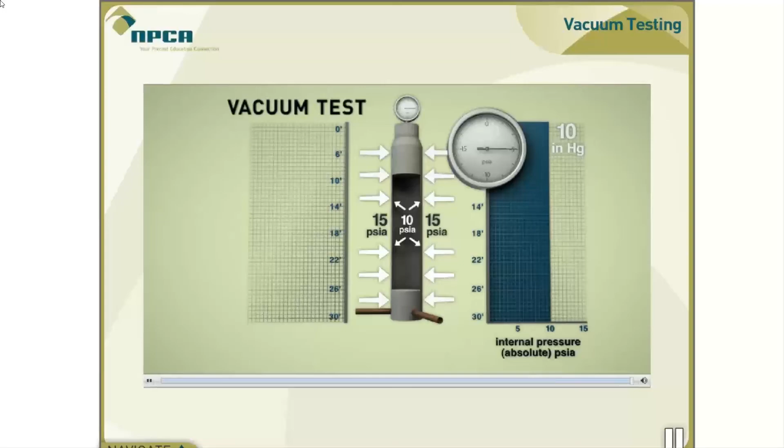ASTM C1244, standard test method for concrete sewer manholes by the negative air pressure vacuum test prior to backfill, has been developed to govern the proper vacuum testing procedure for testing concrete manholes. Let's briefly look at a manhole and pipe system to learn about materials used to ensure water tightness.

Starting at the top, the casting usually sits on risers for grade adjustment. Watertight castings can be installed and joint sealant is used between the risers. Interior seals can also be used to provide additional protection from water infiltration.

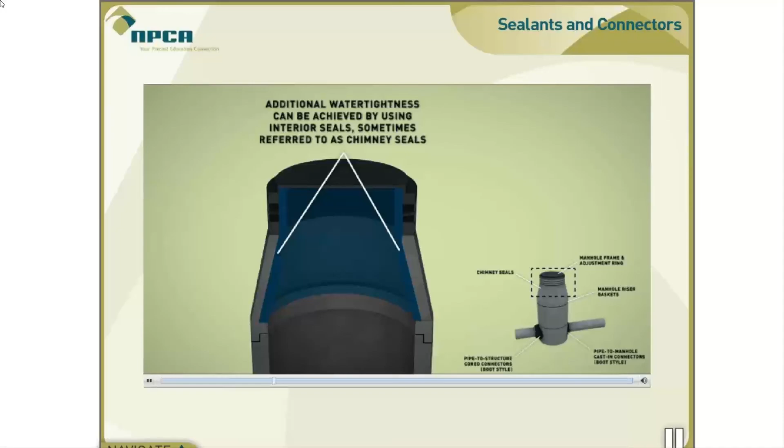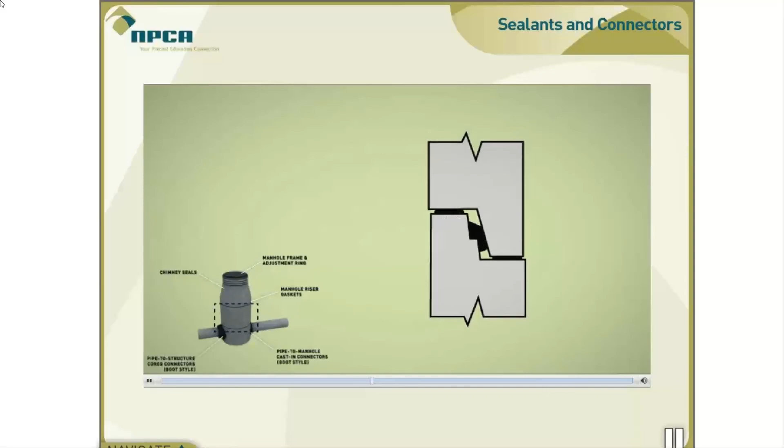Moving down to the first joint between the cone section and the riser section, we see examples of different joint configurations. Gaskets can be used at the joints, which will provide a watertight seal when the joints close. Flexible sealant can also be used to provide additional protection against water intrusion. Exterior joint wrap can also be used in certain conditions that may require additional watertight protection.

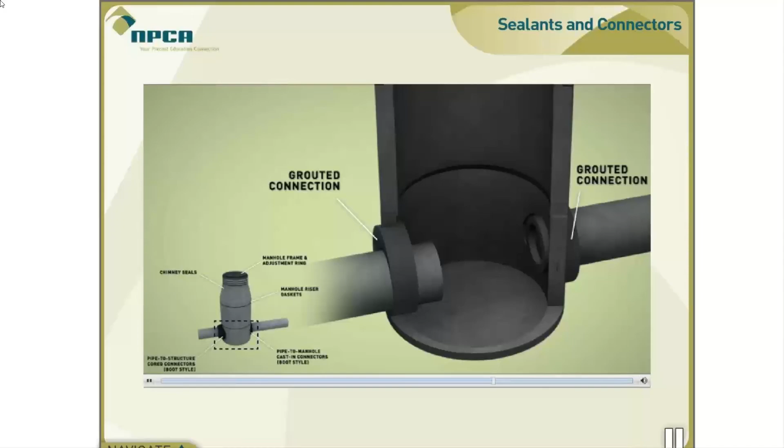Finally, let's look at the base section where the pipes enter the structure. Pipe connections to the manhole are sometimes grouted in the field, but this may not provide a watertight seal. In order to ensure water infiltration and exfiltration are avoided, it's best to use flexible connectors, such as a boot type or compression type connector. These will move with the pipe, maintaining a watertight seal.

Joint sealants, gaskets, and pipe connectors are all manufactured to strict quality control requirements and are tested to meet ASTM specifications. Only these products can be used in approved precast concrete drainage structures.

Let's look at durability. Durability of precast concrete may be defined as the ability of concrete to resist weathering action, chemical attack, and abrasion while maintaining its desired engineering properties. Different concretes require different degrees of durability, depending on the exposure environment and properties desired. For example, precast concrete exposed to tidal seawater will have different requirements than an indoor precast slab.

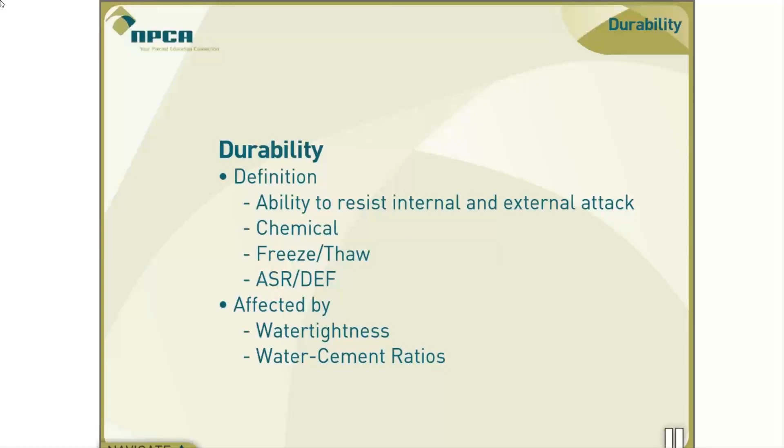Concrete ingredients, their proportioning, interactions between them, placing and curing practices, and the service environment determine the ultimate durability and life of concrete. Now let's look at buoyancy.

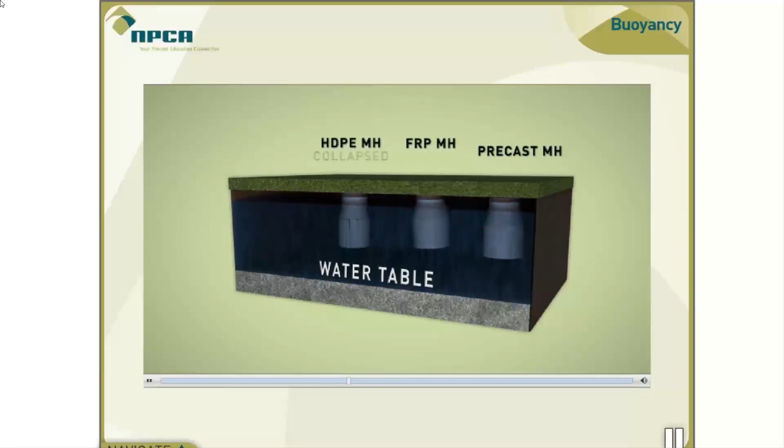Buoyancy is defined as the tendency of a fluid to exert a supporting upward force on a body placed in a fluid. It can be determined if an underground concrete structure will float or sink using basic principles. Essentially, a structure will not float if the sum of the vertical downward forces is greater than the vertical upward force. Precast concrete structures have an advantage over other materials due to its high specific gravity of 2.4, which allows it to resist buoyant forces. It will not collapse or float out of the ground in high water table conditions.

Let's look at ease of installation. Precast concrete structures are engineered materials and do not rely mainly on engineered installation as other materials do. This means the structure is designed to counter forces on its own, despite the nature of its underground environment. Also, it comes to the site ready to be installed, reducing the need for large staging areas. Weather dependency is also not an issue when installing precast concrete products. This is why contractors love to work with precast concrete.

The precast, compared to the old ways or any other way that I would know how to do it, has really cut the manpower down, probably I'd say 40%. It sounds like a lot, but it is, because the one crew that does the pipe does the manholes. So that's just a bigger, fatter piece of pipe in our eyes now, is the way we look at it.

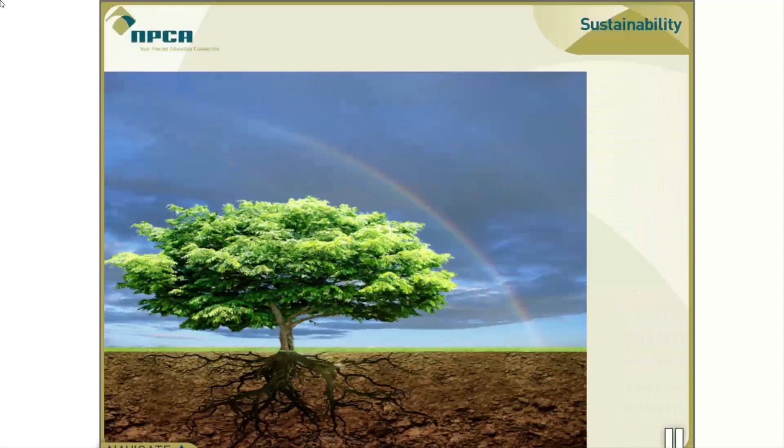Let's look at sustainability. The use of precast concrete structures is a sensible choice for sustainable development. Precast plants reuse formwork, in itself a conservationist move, and in doing so, reduce construction waste that would otherwise be generated at a job site. Because precast concrete components are modular and standardized, they are installed in a quicker fashion and result in reduced construction times and energy usage, noise and emissions from on-site equipment, and in reduced site impact.

The cement used in concrete is made of natural materials such as limestone and clay. Most cement plants rely on nearby limestone quarries.